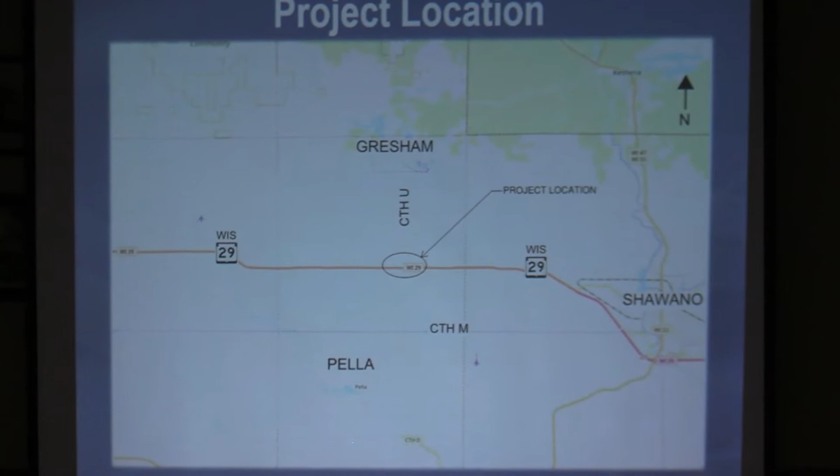So just a little bit about the area. Most of you are probably really familiar, but our project location here, County Trunk Highway U, kind of in between Pella, Shawano, Gresham, Keshena, the Menominee Reservation, North Star Casino, Mohican Casino. We know this is in the Shawano School District. U is kind of an important north-south road between Pella and Gresham.

This is an aerial photo of the project location. This is the County Trunk Highway U intersection. These yellow lines indicate our right-of-way, currently what the highway right-of-way is in the area, what area we're working with. So this is the U corridor, and this is the 29 corridor.

A few things we know about this area. The County Trunk Highway U traffic on the north is about 1,500 cars a day. County Trunk Highway U on the south, 380 cars a day. Highway 29 typically has around 9,100 cars a day. Highway 29 is also an important, what we call an oversized overweight route. It carries a lot of big freight. We also know Highway 29 is a designated wind tower corridor, so it's an important route.

Why we're here today. In 2011 to 2015, this location showed up as a site of interest, meaning that there were a lot of crashes occurring in this location, and the state said we should look into this. In 2017-18, a safety study was conducted, and they identified that there's a high right-angle crash trend going on at this intersection, and further followed up and asked to get this project funded with Highway Safety Improvement Program dollars. That's what funded this project.

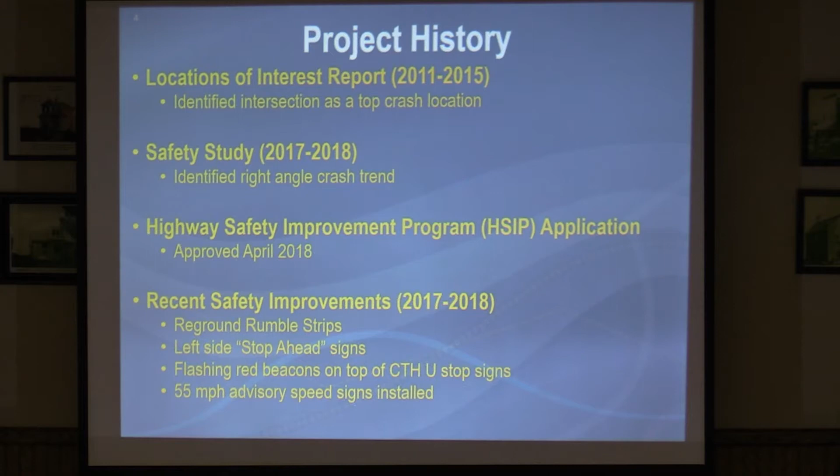This project got funded. I work in our project development section. They assigned that project to me. That's kind of how we got here tonight, and we're just getting started in our design process. You may have seen our survey crew out a month ago out on the corridor gathering information and looking about the corridor.

But because this was a safety thing, there are some things that the department tried to do initially to improve safety. We reground some rumble strips on U. We double signed the stop signs, flashing red on the stop signs. And we also on 29 installed a 55 mile per hour advisory. So we've taken some interim measures to try to help until we can get this project done.

Tonight is kind of an early part of our design process where we're here to listen and learn from the public and consider that information moving forward. And we're on a relatively tight timeline with this project, hoping to be done by November of next year. So we'll be moving rapidly. The department contracted with HNTB to help us with the project, and Ryan's going to help me with the presentation. I'm going to hand off to him and let him take us through some of the preliminary engineering that we've started doing on the project.

Thanks, Tim. I'm Ryan. I'm with HNTB. We're helping the department deliver this project. And I just wanted to start out by talking about the purpose and need for this project, sort of why we're here, why this project exists. The purpose is really two-staged. It is to reduce and or eliminate severe crashes that have been occurring out there, and it's also to improve intersection operations.

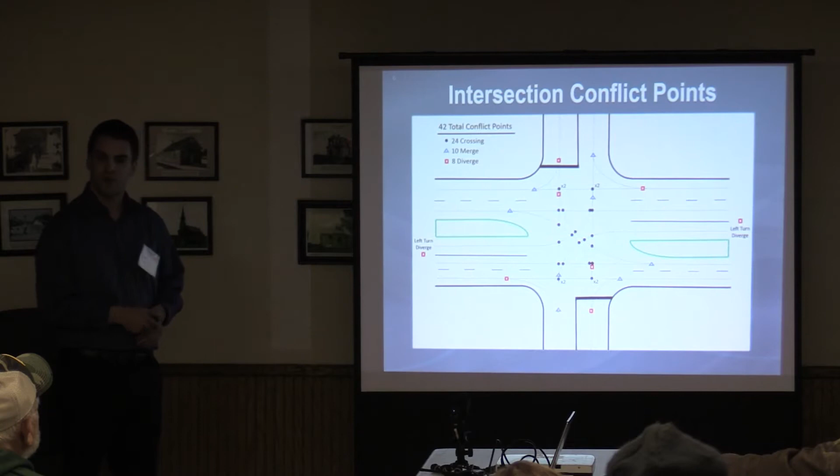Sometimes that left-turning vehicle might cut in front of the stopped vehicle in the median. Other times they might go passenger door to passenger door, which is technically the correct way to make that option. However, it results in congestion or confusion right in this median area and could be a contributing factor to some of the issues we've seen out there today with crash history.

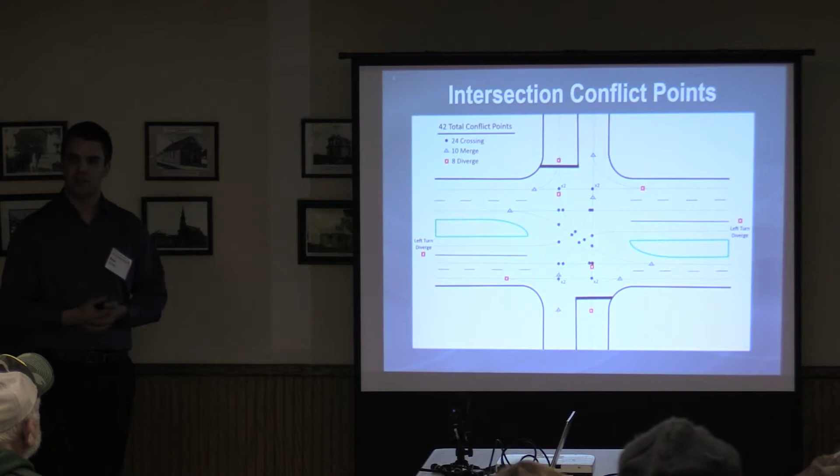Another operational issue I've heard a couple times already at this location is what we're calling the shadow effect. It would be a vehicle driving west on 29, and say that vehicle is going to slow down and make the right-hand turn to go north. When there's another vehicle right next to it, it gets obscured from a person stopped at the intersection, and they think there's a right-turning vehicle and they're good to cross, so they advance, and that vehicle in the inside lane sneaks up on them and there's an accident. I think that's happened out here a couple times. So relating this back to that purpose and need, we want to improve the operations of this intersection.

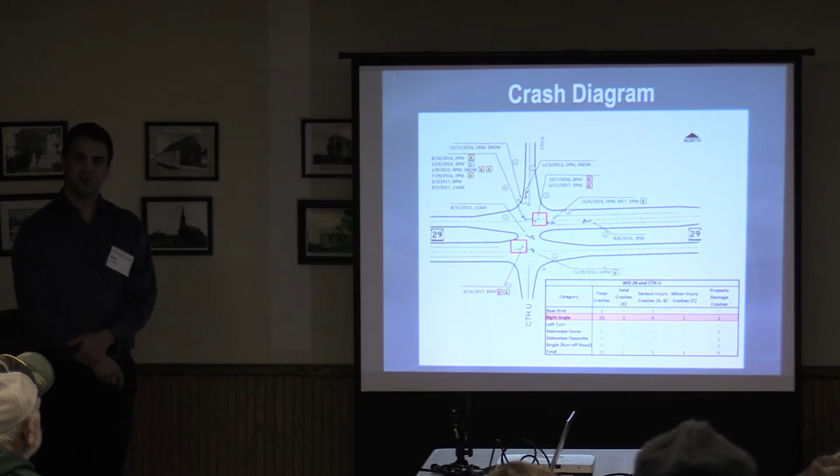This slide is a little bit more detailed of the 29/U intersection in that it's a crash diagram. This looks at about a 6-year duration from 2011 to 2017 at the crashes that occurred here. This is in your handout too if you want a more zoomed-up view. Essentially there was a total of 15 crashes, and the type of crash was documented. Those crashes are all shown on this exhibit: where they occurred within the intersection and what type of crash it was, whether a rear end, a right angle, or a left turn.

What's notable is that of the 15 crashes, 10 of them were right angle crashes, and those have historically been more severe crashes compared to a rear end crash. So 10 out of the 15, 2/3 of them, are right angle crashes. These red boxes drawn on this slide indicate the crashes that were fatalities in this study period, 2011 to 2017. All 3 of them were right angle crashes. They happened in the westbound and eastbound direction of WIS 29. And I will note that there are several more. This list here of 6 does say that there's a higher occurrence rate in the westbound direction.

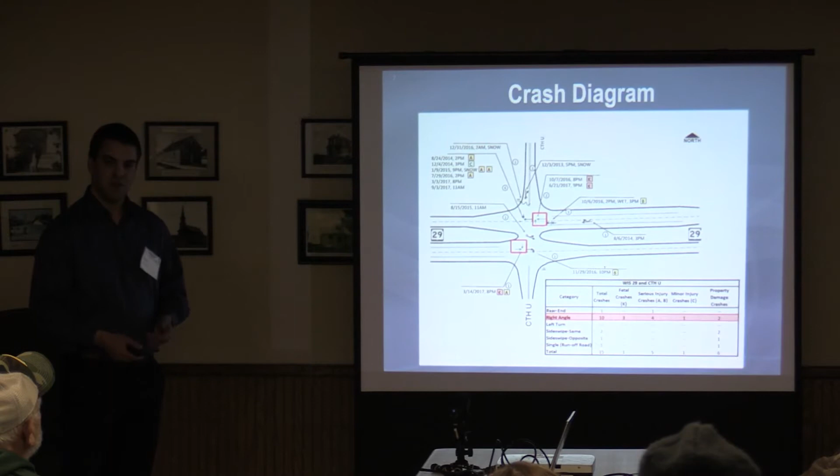So we want to look at why is this happening. Some of it could be due to the operational issues that I mentioned that are inherent to this type of intersection. But there's also some existing conditions going on out here that I'm sure a lot of people are aware about. And notably what I want to speak to on this slide is the existing hill that is just east of the U crossing along WIS 29.

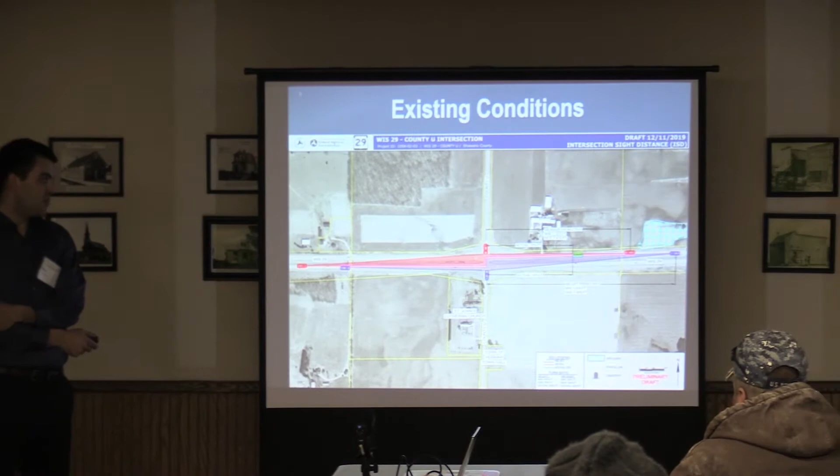So if you're stopped, we want you to see that far. It's over 1,800 feet to the right, and that would allow you to have enough time to identify if you have enough time to cross or not, and do it safely. Same thing driving south, that's the red. If you're looking to the left, the modern standards dictate that that red vehicle represents how far away that should be.

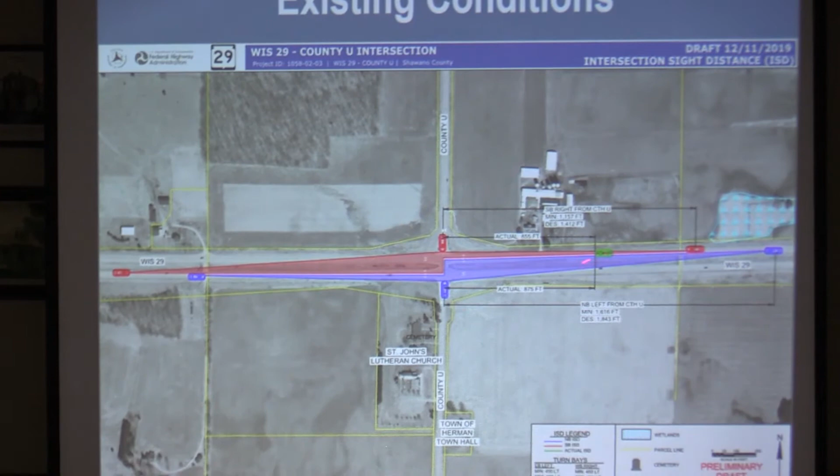Okay, well, the actual condition is represented by this green vehicle here, which you can see is much closer than the desirable standards dictate. So there's a sight distance issue. It's largely driven by a crest curve that exists right along this area, like I mentioned, and it's obstructing the view of people crossing WIS 29 on U to make a decision safely that a vehicle won't strike them.

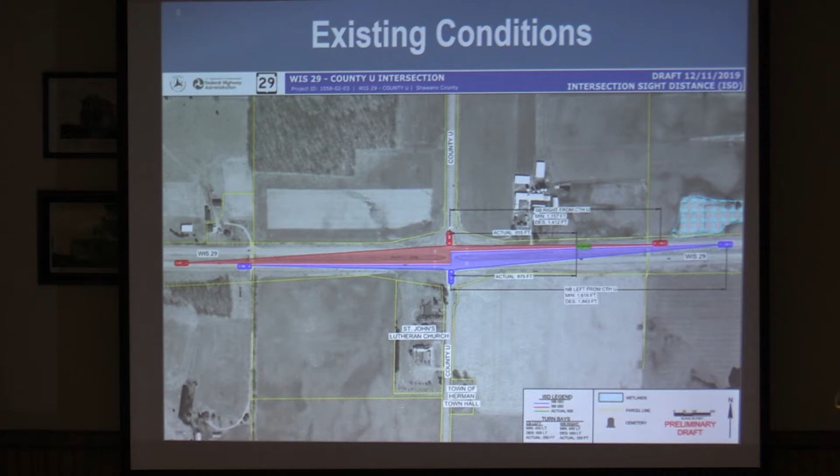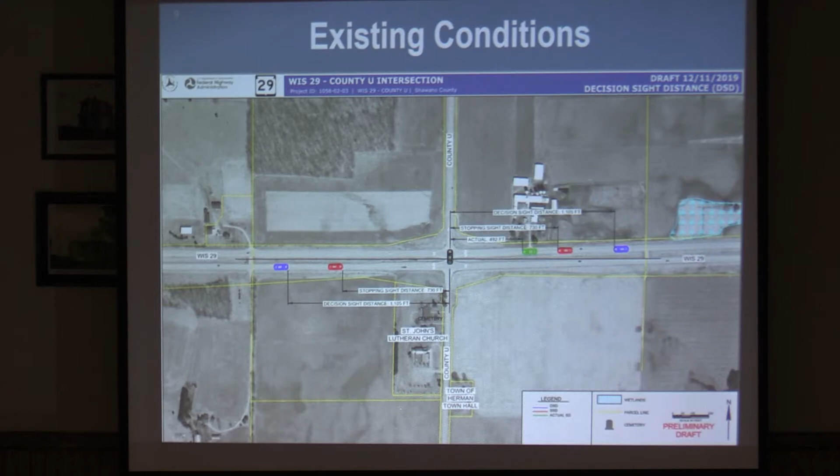So moving forward with this, what are some conceptual, reasonable alternatives that this HSIP application grant that Tim mentioned could construct to help meet the project's purpose and need? There's 4 of them that I'll show here, and these are on boards in the back. And they're conceptual, they're templates overlaid on the existing aerial. They would be further refined and engineered to fit the situation if one of them moves forward. But today they do convey what the intent is and what the concept is.

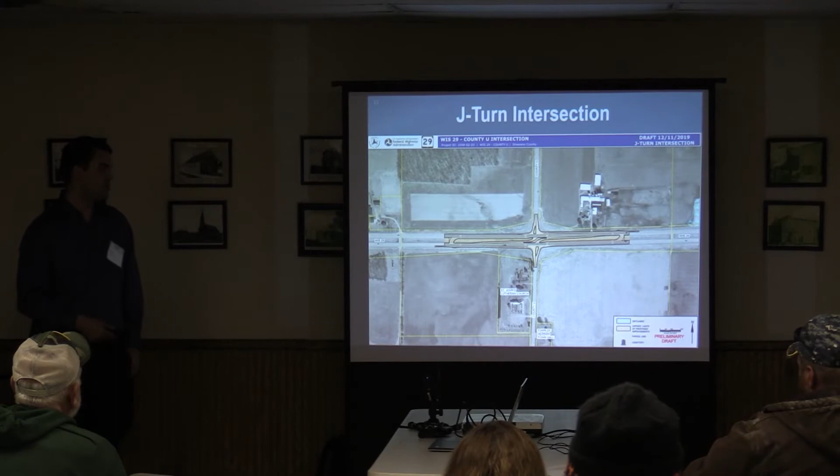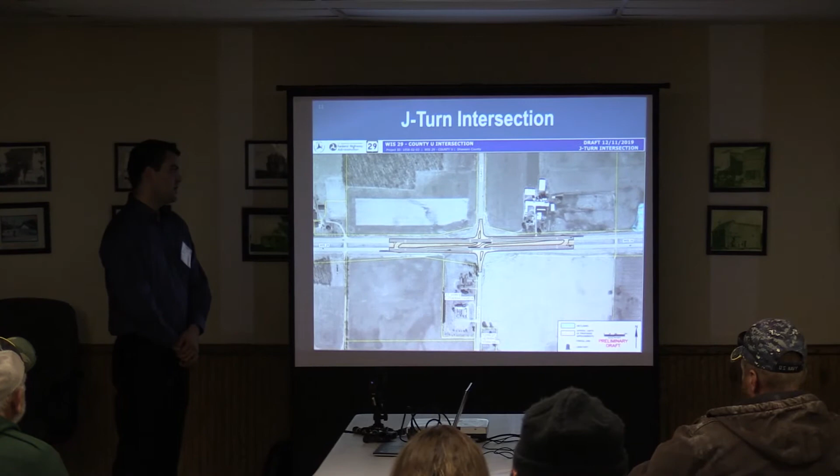So this first one is a J-turn intersection, and compared to the existing type intersection, it cuts those down to about 24 or so, almost in half. And it accomplishes this by not allowing the through movement on U directly across WIS 29. A vehicle driving north that would want to cross WIS 29 would actually make a right-hand turn, so they would only have to consider one direction of traffic on WIS 29 at a time. So they'd make the right-hand turn, considering the eastbound traffic.

They would be in a separate left turn lane potentially where a U-turn would occur, and then they would come back and make a right turn again. So they would only consider the westbound direction of 29 when they were doing that maneuver. So it splits up the crossing. It reduces what the driver has to consider for oncoming WIS 29 traffic, but it also pushes the crossing point farther to the east, where that crest curve that I was talking about is obstructing the sight.

Well, these vehicles would be potentially higher up on that hill, so they could see oncoming traffic, and oncoming vehicles could see them. So it's helping operationally reduce the conflict points. It's helping sight distance by pushing that crossing maneuver farther to the east.

It's symmetrical, so a vehicle driving south on U would basically follow the same procedure in the opposite direction. That is one alternative. Another alternative that is back there on the boards is the median U-turn intersection.

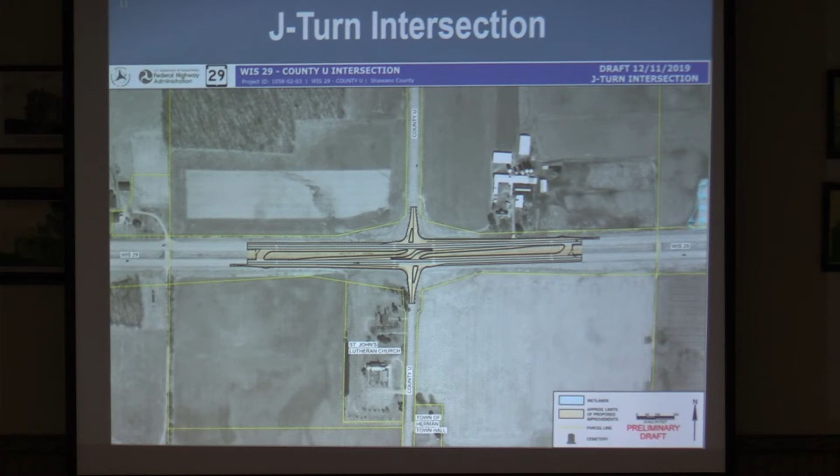This is similar, but it does not provide for, let me go back. A vehicle on WIS 29 that wanted to go south or north on U would have a left turn median opening here that they could make, sort of similar to how it is today. There's a left turn lane off of WIS 29 to go north or south on U. I needed to note that because this median U-turn intersection alternative does not provide that.

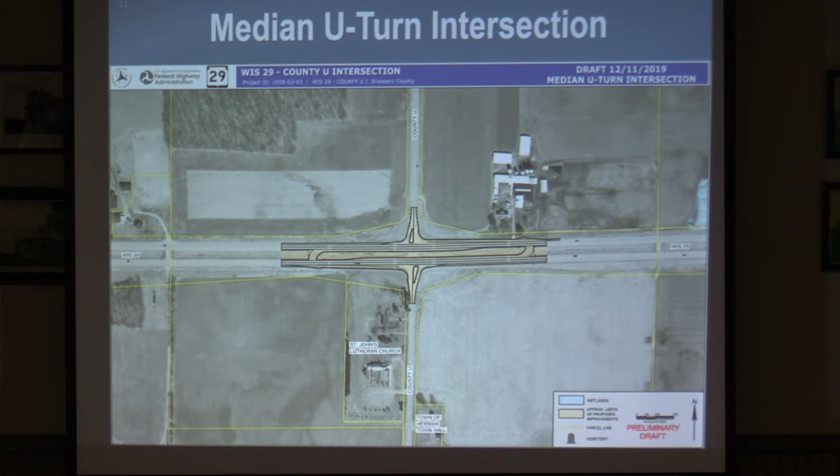This consolidates all of the through and the left movements to these U-turn locations, which again would reduce the conflict points, allow drivers to focus on one direction of traffic at a time along WIS 29, and also push this sight distance farther to the east, further up that crest curve so that it's more visible for crossing traffic. This is another alternative.

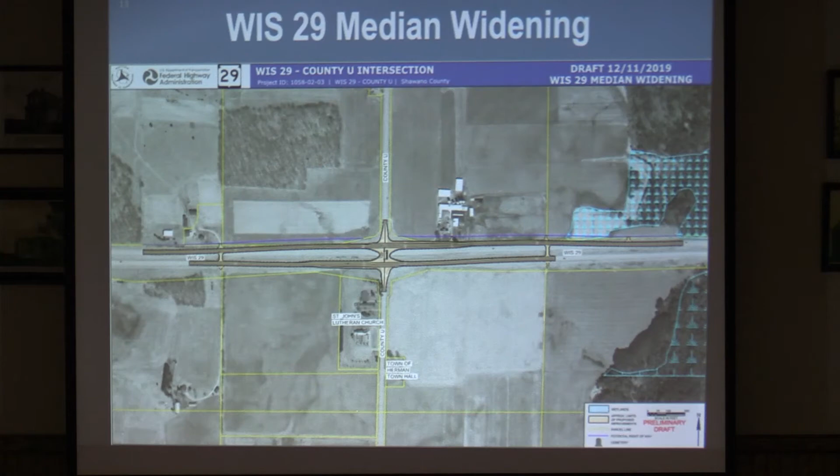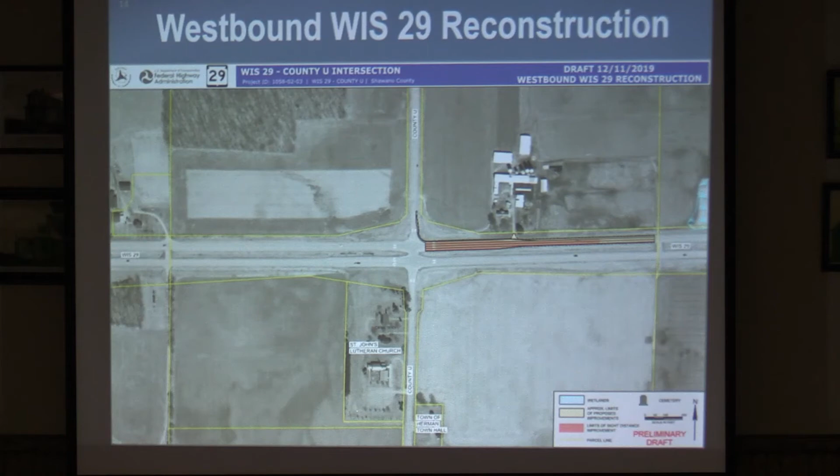So those are the four alternatives that are on the table right now. They're conceptual, they need to be advanced and engineered further to make it right for the situation, but that is what is reasonable and feasible at the moment. This is the schedule and next steps. So we've already come past this point. November 19th, we had a local officials meeting here, presenting similar information, and got feedback from local officials.

We're at public involvement meeting number 1 right now, where, as Tim mentioned, we're looking to get your feedback. And moving forward, there's going to be another round. Local officials meeting number 2 and PIM, public information meeting number 2, will happen in February and March, tentatively. At these meetings, we'll have a preferred alternative. So instead of 4 alternatives presented back there today, by this time we hope to have it narrowed down to 1 and have some engineering further along to show what the real impacts are and present that to everybody.

The environmental document process would take place by April. The design plans, the construction plans, would be completed by November, and this is currently scheduled for construction in the 2021 season.

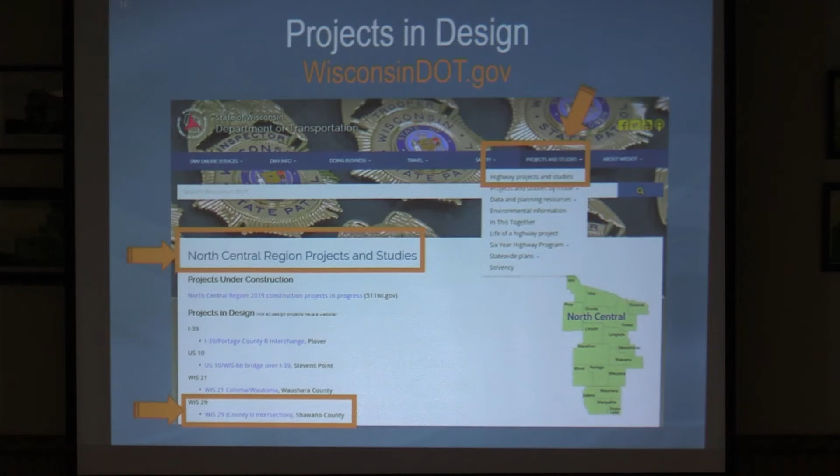For more information after this, the project will have a website. This is also in the handout for how to access this, but at wisconsindot.gov, there is the projects and studies section here. Click on North Central Region, and you will see the WIS 29 County U intersection. That'll have similar content to what we presented here today for future reference.

And like we said, we'll take questions now, and after this we'll follow with the open house format. We'll stand back by the boards and talk one-on-one with anybody.

Currently, at this intersection or similar intersections, do you ever put a stop sign in the median before you cross the second set of lanes to suggest to people that they better stop in the middle and look? Typically, operationally, we wouldn't unless the median was wider. And so the wider median alternative would have that, but in the narrower medians and typically in the expressway designs, that's not included. Ideally, those medians are designed to be a single stage maneuver where you sit on the side road, make your maneuver, and go through and don't stop.

We recognize that at times people do use them as a two-stage where they pull out and do it half at a time. But as the volumes increase and the turning movements increase, that can cause some confusion. We've had similar projects where, the right way to make that left-hand turn is passenger door to passenger door. You've seen some cars drive past somebody and kind of square themselves up. You see a lot of different things, but the legal way to do it is passenger door to passenger door when you're making a left-hand turn. Your passenger door should be next to the other car's.

And some of you may have seen that out at this intersection, see this gentleman over here is nodding his head. So that's just how it should be driven, but that leads to some of the confusion. As the volumes go up, I've seen 3 or 4 cars parked in the median, somebody's trying to make one left, someone's trying to make another left, and then there's the person in the middle who's trying to do something. So sometimes as volumes increase, that becomes a concern on how to manage it. There are no lane stripes in that median. Correct.